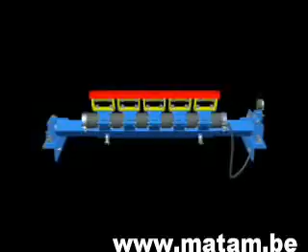Our products are patented in more than 20 countries, and their success is based on sound engineering principles. The Dirt Whacker primary and secondary belt cleaner systems provide solutions to many of the problems that have plagued the industry for a long time.

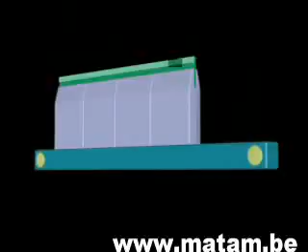A widespread problem that is experienced by the bulk handling industry is the effective adjustment of the conventional scraper. The conventional scraper is mounted on a solid carrier. The carrier in turn is kept in place with mounting brackets. To compensate for wear on the scraper blades, the solid carrier needs to be adjusted towards the belt.

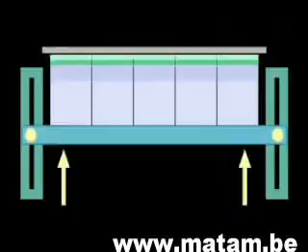This operation requires skilled labor, as incorrect adjustment can cause accelerated top cover wear or excessive spillage. Incorrect adjustment leads to accelerated belt wear and excessive spillage.

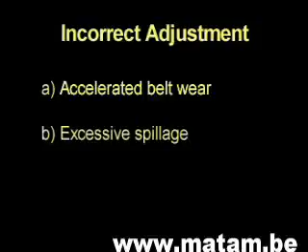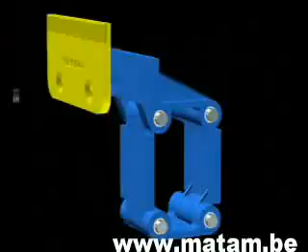The Dirt Whacker belt cleaner blades are individually mounted on a parallelogram, which in turn is mounted on a main frame. The main frame's position is determined during the initial installation, and there is no need for further adjustment to the main frame.

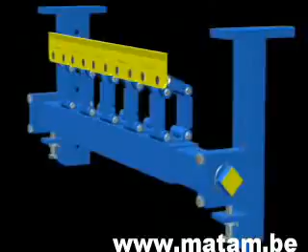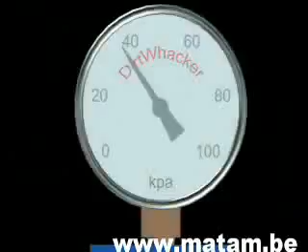To compensate for wear on the cleaner blades, the Dirt Whacker makes use of a single air bladder that services all parallelograms on a given belt cleaner. As the air bladder is pressurized, it exerts force on the inner walls of the parallelogram, thereby providing a precise controllable belt-to-blade pressure.

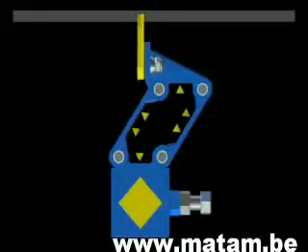From a convenient location, the pressure in the air bladder can be monitored and maintained as blade wear occurs. No skilled labor is required to maintain optimal belt cleaning with the Dirt Whacker.

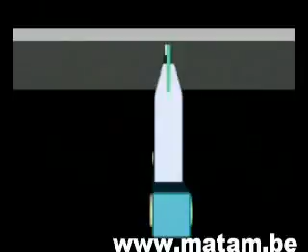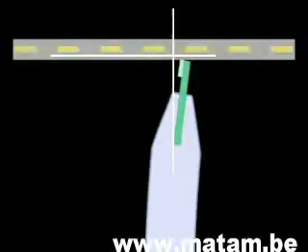Blade angle of the conventional scraper. Maintaining the correct blade-to-belt angle is imperative if excessive spillage is to be avoided. The conventional scraper blade arrangement is susceptible to friction that occurs between the conveyor belt and the blade. The belt-blade friction forces the blade into a negative belt-to-blade angle.

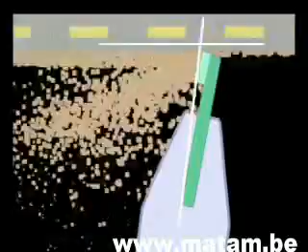The kinetic energy inherent in the velocity of the material forces the scraper blade further into a negative angle. A negative belt-to-blade angle acts as a conduit, and material is forced past the blade. To reduce the spillage that is occurring, the conventional scraper unit is readjusted towards the conveyor belt.

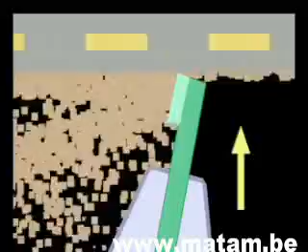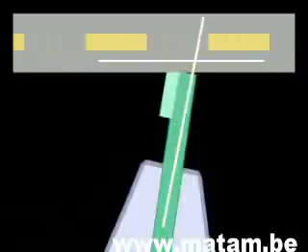When the material is removed, the conventional scraper blade will be forced into the top cover of the conveyor belt. Thus, accelerated top cover wear will occur. Incorrect blade-to-belt angle leads to excessive spillage and belt top cover wear.

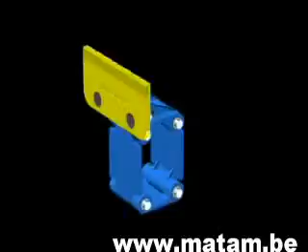The Dirt Whacker principle of operation is based on a parallelogram. The durable construction of the parallelogram ensures that the belt-to-blade angle, which is determined during installation, will be maintained throughout the life of the blade.

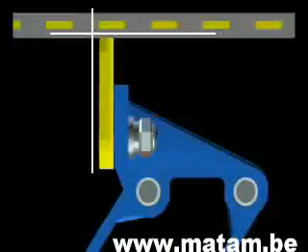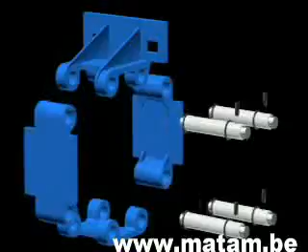The construction of the Dirt Whacker parallelogram ensures an extended service life. The nylon-coated hinge pins are sealed off from the harsh operating environment with O-rings. The construction of the Dirt Whacker parallelogram facilitates trouble-free maintenance. The blade-to-belt angle, as determined during installation, will be maintained throughout the life of the blade.

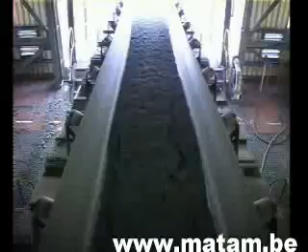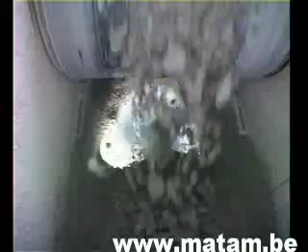Blade wear of the conventional scraper. Due to the loading pattern on conveyor belts, the abrasive material tends to settle towards the middle of the belt. Over a period of time, the impact of the bulk material causes an array of indents on the top cover of the conveyor belt.

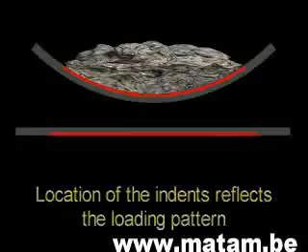The location of the indents reflects the loading pattern. These indents on the top cover act as receptacles for the abrasive carryover material. Accelerated wear occurs as the carryover material passes over the conventional scraper blade.

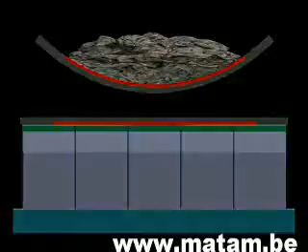As abrasive material settles towards the middle of the belt, the scraper wear will be a mirror image of the loading pattern. When the conventional scraper assembly is adjusted to compensate for wear in the middle section of the scraper, the outer sections of the conveyor belt will be overpressurized. This results in accelerated top cover wear. Carryover leads to accelerated blade wear and belt top cover wear.

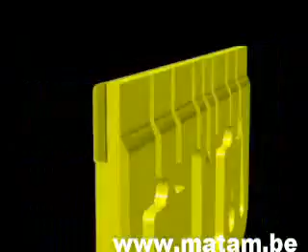The Dirt Whacker blade system is engineered to significantly reduce blade and conveyor belt top cover wear. The thermal grooves minimize thermal stress on the blade and hard metal insert. The soft metal insert protects the hard metal insert from mechanical and thermal shock. Dirt Whacker blades provide a wear life of 15 mm hard metal.

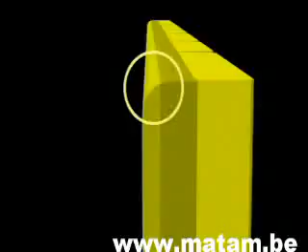Utilizing a rounded leading edge, the Dirt Whacker blade system can be applied to the conveyor belt at a greater force than the conventional scraper. Making use of the inherent flexible properties of the conveyor belt, all materials, including those lodged in the indents of the top cover, will be squeezed out of the belt, and a clean belt will then be conveyed over the hard metal insert of the Dirt Whacker blade.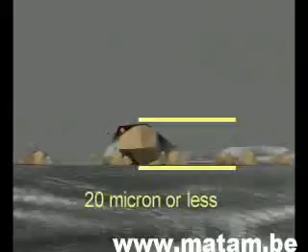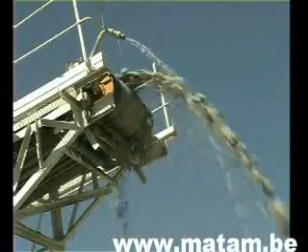If the indents into the top cover are 20 micron or less, and the correct belt-to-blade pressure is maintained, the wear on the hard metal of the blade will depend only on the conveyor belt speed and the presence of mechanical fasteners, and not on the abrasiveness of the transported material.

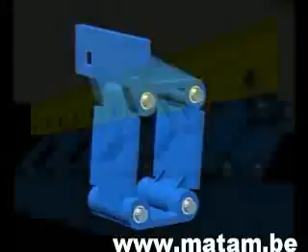Each parallelogram unit compensates for blade wear. As a single air bladder supports all parallelogram units on a given scraper, the belt-to-blade pressure of all the individual blades remains equal in spite of wear. Each parallelogram unit is able to respond speedily to load-varying conditions. The Dirt Whacker blade system does away with carryover. The single air bladder ensures uniform belt-to-blade pressure.

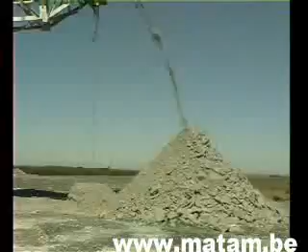No skilled labor is needed to keep the Dirt Whacker functioning optimally. Only the air bladder pressure needs to be maintained as determined during the initial commissioning of the Dirt Whacker cleaner. Blade height must be verified at regular intervals. The abrasiveness of the bulk material will determine this interval.

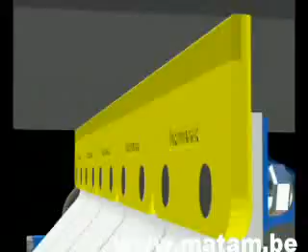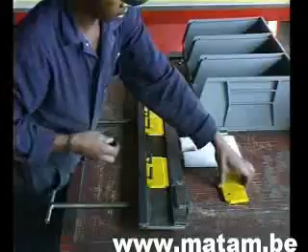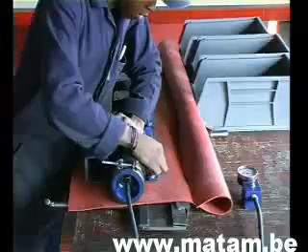Replacing the blades is a cost-effective operation of removing the unit by undoing 4 bolts. By making use of the blade alignment tool, the blades are aligned with ease. Installation of the Dirt Whacker belt cleaner is explained on the Dirt Whacker CD-ROM by means of video and printable material.

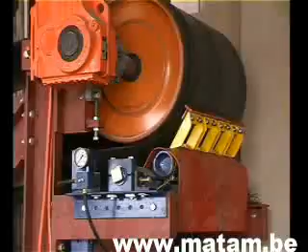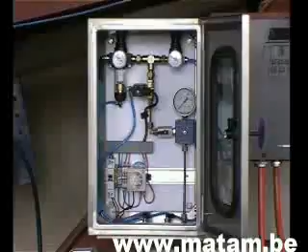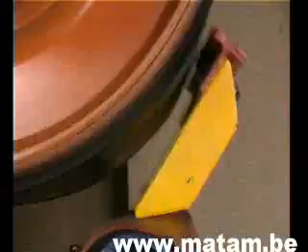As the belt-to-blade force of the Dirt Whacker primary and secondary cleaners is controlled by air pressure, the Dirt Whacker belt cleaner units can be remotely monitored and activated as needed. The Dirt Whacker control units allow for the seamless integration of the Dirt Whacker cleaners with the conveyor plant PLC system. As a result, the activation and full or partial deactivation of the Dirt Whacker cleaners can be fully automated.

The feature allows for problem-free operation on fast, dry-running belts. Belt top cover wear is significantly reduced if the belt cleaner is not active when the conveyor belt is running dry. The Dirt Whacker cleaners can accommodate reversible conveyor belts.

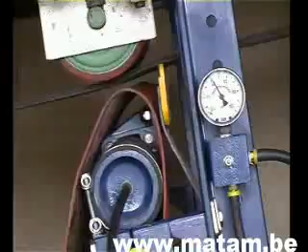The Dirt Whacker primary and secondary cleaners function well on most mechanically joined belts. The Dirt Whacker product range is successfully deployed on conveyor belts with speeds of up to 6.7 meters per second. The unique technology of the Dirt Whacker makes efficient belt cleaning available to the industry, with conveyor belts of up to 4 meters wide.